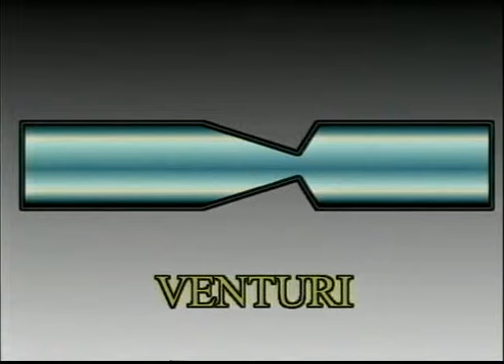And it works off the concept of a venturi, by the name, venturi. And what a venturi is, is a big pipe that necks down very rapidly to a very small opening and then expands right back up again. So if we look at a venturi, what we do is we put a little hole right here, and now we have liquid flowing in a direction.

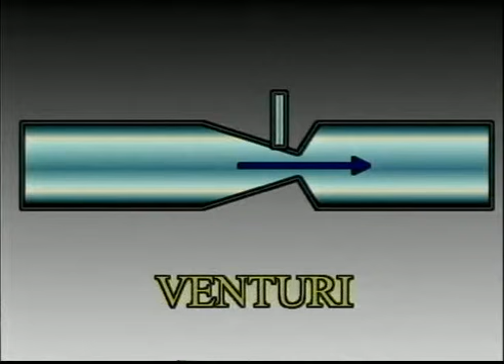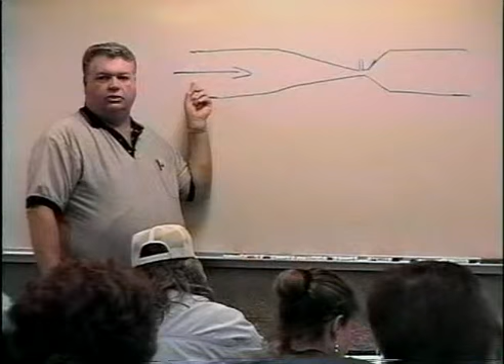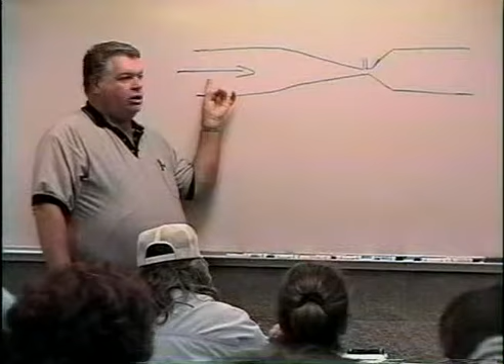Now what happens hydraulically is this. Real low velocity over here on the left-hand side of the venturi as it enters the venturi. As we neck the piping down, we have the same flow rate at this point as we do at this point. So what has to happen to the water? It has to get going way faster, doesn't it? So we've increased the velocity radically from the point of the full pipe size into the throat of the venturi.

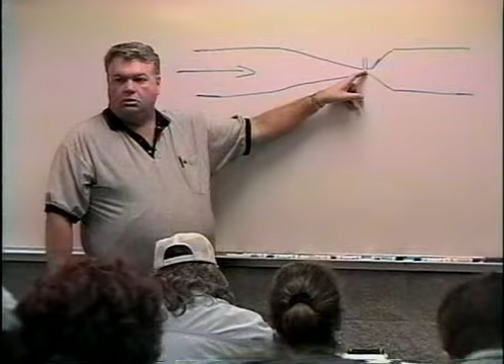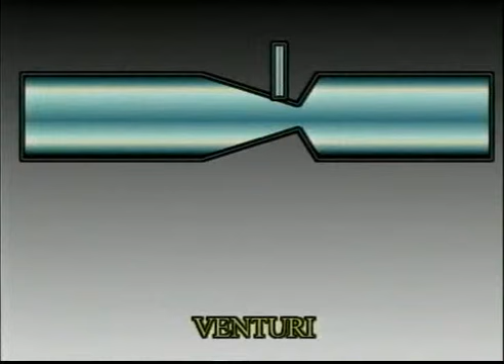Now whenever we increase the velocity, it drops the pressure. So all of a sudden the pressure over here, right here, we'll call that point A. And we'll just call this point right here point B. So the pressure at A is going to be quite a bit greater than the pressure at B.

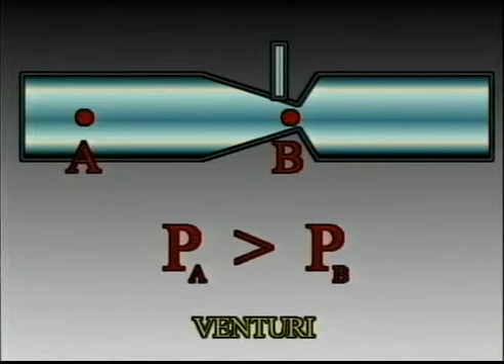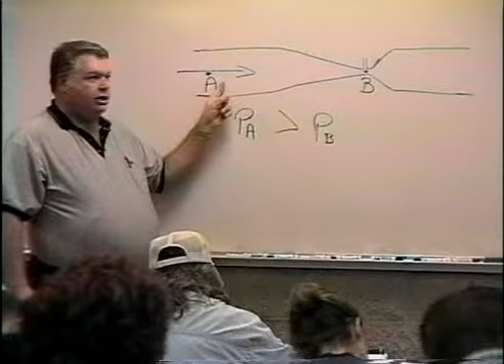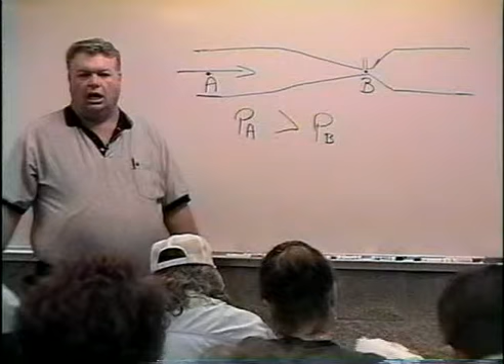What we've done is we've converted pressure to velocity head. And actually what has happened is now we have gone from pressure head to kinetic energy. By increasing the velocity, we've converted a bunch of that pressure into kinetic energy, speed of water, the high velocity of the water. So the pressure drops to conversely affect it.